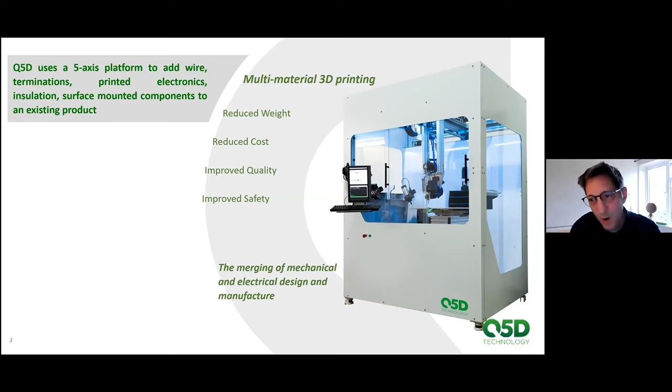Together we created a 5-axis machine. You can see the first one we built on the right here, a 5-axis machine with an interchangeable head, so you can swap out the head to add wires or filaments, do terminations, do printed electronics, add insulation, and surface mount components. You can take an existing component, mount it onto the machine, and then add things to it — because there's no point using FDM and additive manufacturing alone, it's very slow. If you can take an existing component and add to it, it's a much more efficient method for manufacture and improves throughput completely.

So it's multi-material 3D printing, aiming at improving weight, cost, quality, and safety. Safety, because if you're embedding the wires and printed electronics into the component — particularly with power electronics and power wiring — the wires can't get close to each other or fret against each other since they're embedded. You don't get arc-over events and fires, and because you're sealing them in, the ingress of fluids that would damage the wiring can't happen so easily. So you create something inherently safer than existing wiring harness technologies.

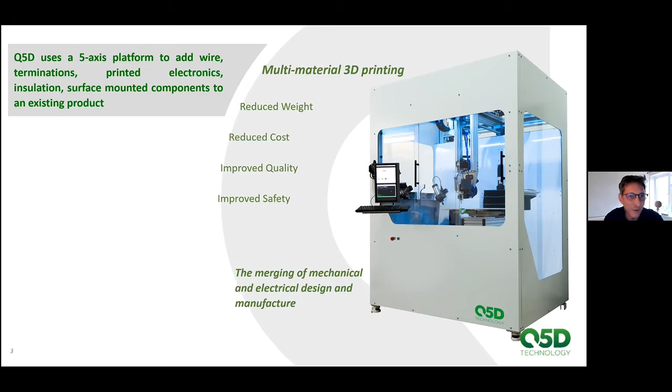One thing I'll talk about later: you're now merging the mechanical and electrical design of your components. When doing finite element analysis to study the strength of your component, if your wiring is embedded, you're also doing finite element analysis on the electrical subsystem, which is rarely done at the moment. This means switching to a completely different way of designing products, and different ways of checking the reliability of that product under stress and strain.

The first head I wanted to talk about is the FDM head — this has been mentioned already, a lot of people are doing this kind of thing. It's obvious you have to move to 5 axes, for manifold reasons. One is that if you were trying to print this with standard 2D layered additive manufacture, to create a structure of this type with its fine walls, you'd have to print a whole bunch of support structures to accommodate the overhangs.

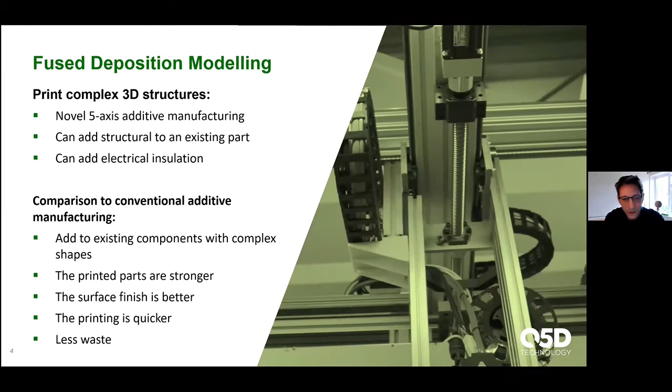In here, because you're printing onto an already solid structure, you don't need to do that. So your print speeds can be 5 to 10 times faster.

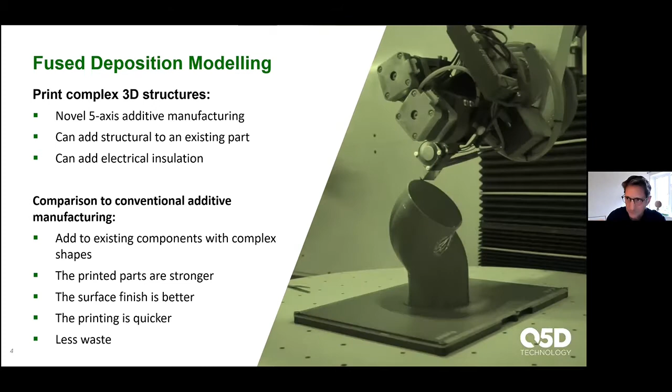Obviously, you can add to an existing component and a complex shaped component. The parts can be stronger because you can arrange your layers in the printed part to be aligned orthogonally to the stress axis of your component. So it has a whole bunch of important benefits going to these 5-axis structures, 5-axis machines.

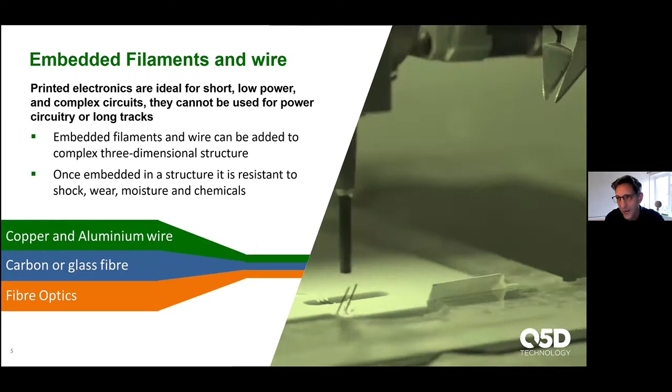And one of the things - I know it's a printed electronics conference, but this is really quite important for us - we embed wires or add wires to structures. Either they're copper like this, or you can add an aerospace or an automotive qualified wire onto a material. And that's important because obviously electronics is great, and you can use printed electronics for that perfectly.

But when you have any kind of level of power in the system, they don't work so well. And if you have very long tracks, and some of the things that we are working on, like the beds and all the chassis of battery electric vehicles, then printed electronics are never going to cut it, because you really need to have wires for that kind of thing.

Once you can embed wires, then obviously it's not just limited to that. Any kind of filament you can add. So we have projects on fiber optics, where you're adding fiber optic sensors or data transfer into materials, or you can add stiffening members. And again, that's really quite important.

If you want to do printed electronics onto a surface, they are very fragile structures. And adding a little carbon tow or a filament underneath that or around that to provide some stiffening, just so that under strain that piece of printed electronics doesn't break, can be very valuable indeed.

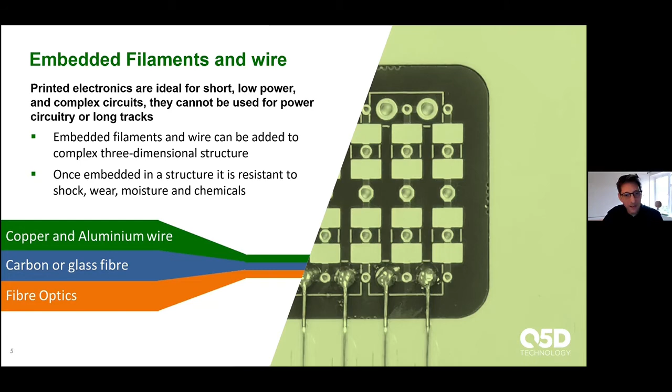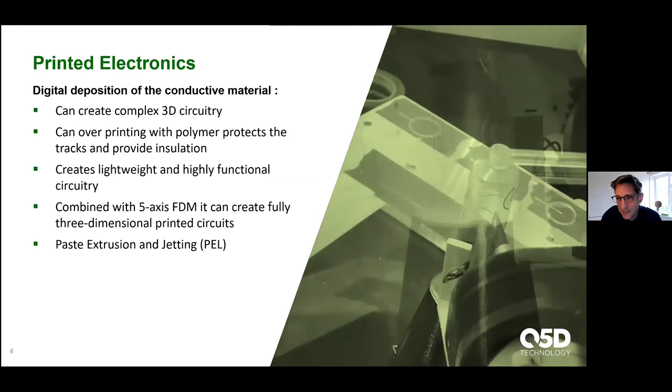We have kind of a very standard - sorry about the picture, it's just what I found as an example - but we have the standard kind of printed electronics, either paste extruder here, or we have from PEL a jetting head. So we can print on complex structures and then build up structures with the FDM printer, and then add to it, and then overprint it.

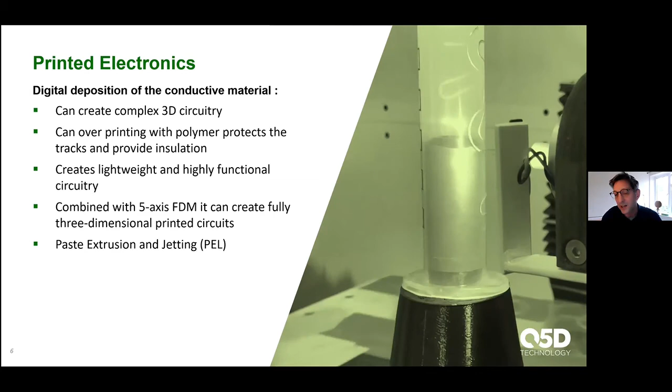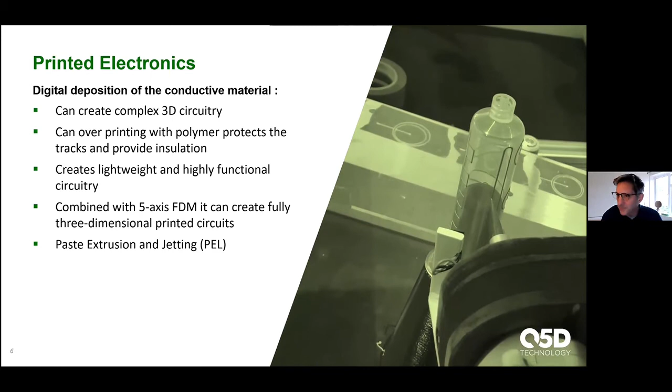However, I have to say that this is not ideal for us, because the 3D print, the printed electronics, is always just part of a larger construction or a larger build. And so you either have to build an oven into the machine, which we have been thinking about doing to cure the paste, or take the component out, put it in an oven, and then try and remount it back in exactly the same position afterwards. And that not only breaks up the manufacturing flow, it slows things down, and is a place where you can start to incorporate errors into the design, into the manufacture.

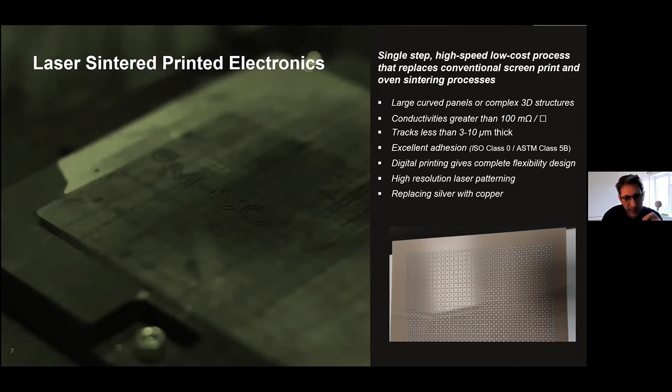We were going to a kind of different process, one that was developed by M-Solv, and it's been talked about at least by Neotech. They're doing something very similar, and that is to use lasers to sinter and cure a paste. It can be very efficient. In this particular case, you can sinter quite large areas very, very quickly.

From our perspective, we are working with M-Solv to miniaturize the laser heads so that we can put this onto the robot arm, so that we can create large curved panels with printed electronics on it for various applications, but obviously some of which I can't always mention about.

But what the benefit is on this particular case is that you get very, very good conductivities. Because you're sintering the copper or silver paste, you can get something that is close to about 1/3 of the conductivity of the pure metal. It's still slightly porous, so it never gets quite up to the full conductivity of the metal, but it's getting there.

And you typically can get accuracies, depending on your print type, of about 10 microns. And as Neotech pointed out, if you use a laser to trim the structures afterwards, you can get down lower than that, down to 3 micron accuracies.

We found, depending on the structures that we put it down on, it has extremely good adhesion, and because it's a very flexible process indeed.

One of the other benefits from our perspective, because we're often going to quite low cost and large structures, is replacing the silver. The silver can be a prohibitive problem sometimes, and the ability to use copper pastes is very, very attractive. And as you know, copper is quite difficult with printed electronics to get good conductivities because of the oxide layers. But that's not really a problem when you're using the laser sintering processes.

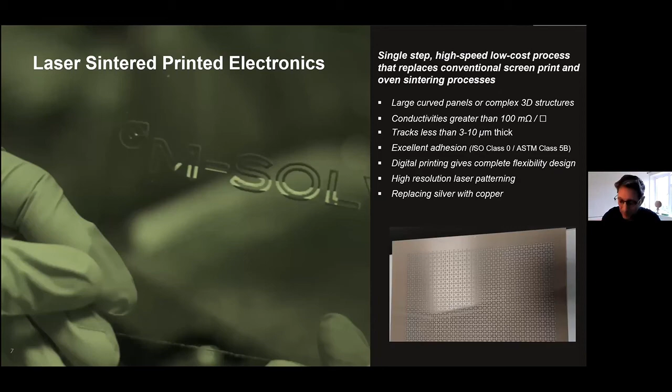As we said, the software is really very central to this, and the whole Q5D project couldn't really occur if we didn't have methods to create or control the machine. I'll jump down to the CADCAM, which is kind of crucial.

We're working with Siemens NX, and what we realized is that quite a lot of the problems we have in controlling these 5-axis additive machines have already been solved by the CNC community. They're taking things off and we're adding things, so there's a plus and minus problem. But if you think about things not in terms of layers, but in terms of lines filling space, which is what you do when machining off a tool from a solid, and reframe the problem along those lines, it starts to become a tractable problem.

Siemens NX have been very flexible with us, and at the moment we're able to create full digital twins of our machines so that we can pre-run the job to make sure there are no clashes, to get time, cost, and other processes out prior to actually doing a run. Really important for us.

It's also important that we're now incorporating the electrical part of the system into the mechanical part. You're now designing those two things at the same time. In the past, you'd create your large structural part, and then leave holes in that large enough for your electrical subsystem to be pulled through or fitted in. That's fine, but it means you're breaking up that problem into different parts, done by different engineers, often by different companies, often on different parts of the globe. That can be a very, very slow process.

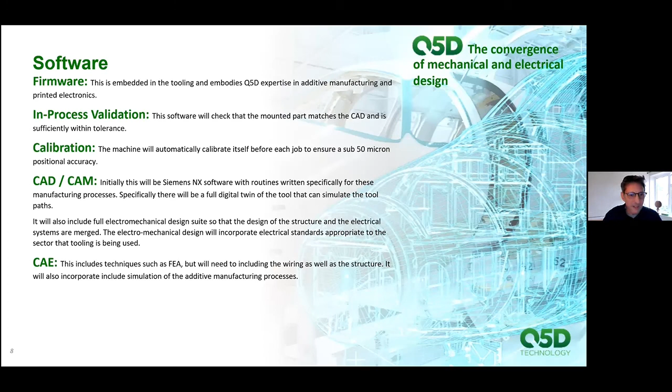So that bit is off in the future, but I think it's a really exciting prospect, the ability to do that. I think I can finish with just one example that we can talk about.

It's a grant we've just started now to work with Safran, the French aerospace company, on their first and business class seating. It's interesting how similar some of these things are to what other people are doing. The composite panels they use, the lightweight composite panels used to separate out the seating, have a lot of wiring on the back of it.

It uses very heavy standoffs, aerospace quality wiring, heavy terminations, and everything's made by hand. Obviously a plane gets narrower towards the front of the aircraft, so each seat is subtly different, and it's quite difficult to automate.

But with an additive manufacturing process, that's not really so problematic. So what we're doing with them is taking those composite panels, putting a layer of polymer onto that, embedding the wiring, and because it has to be aerospace qualified, we have to use aerospace qualified wires directly. Then terminating those, adding the terminations on the end, adding other components with pick and place, surface mounted components.

We haven't actually started, but we would love to try, and we're trying to pitch at the moment to add capacitive controls onto those rather than normal switches. And then you can overprint and seal the entire system.

The reason that's important is they're trying to move to biosecure cabins. It's quite an important thing for the community at the moment. They're either cleaning the place with UV or with some aggressive chemicals, and you don't want the wiring to be damaged. Also you don't want any touch points. So the idea of using capacitive and other slightly less touch controls is gaining quite a lot of traction in the airline industry.